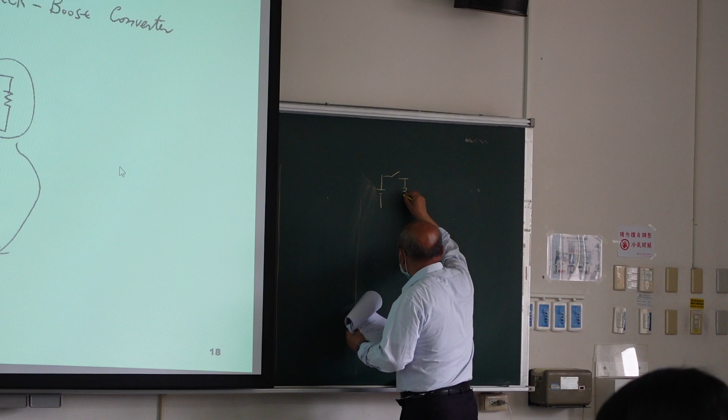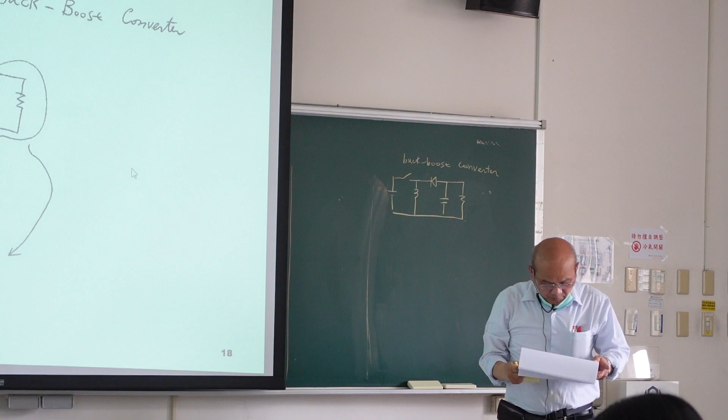Because it can create buck and also boost converter. So you think buck-boost is great because it is a new idea, and we use only a few devices, but we can obtain buck and boost together.

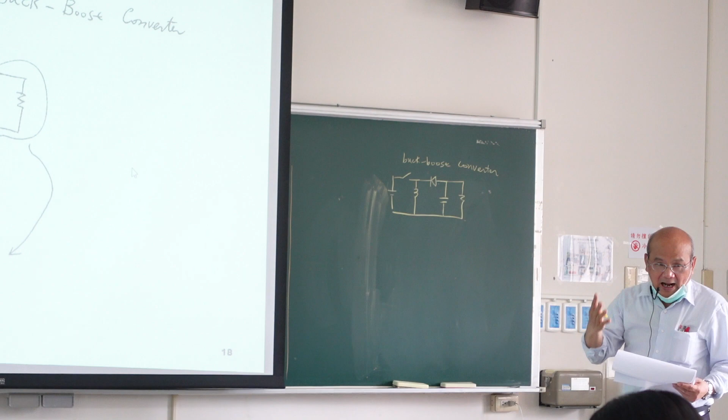Then there was a professor. He has a student, his name is Cuk. The student was studying at Caltech, which is a quite famous technology university. So the professor asked Cuk to go back and sleep, and asked him to develop a circuit which is the duality of the buck-boost converter.

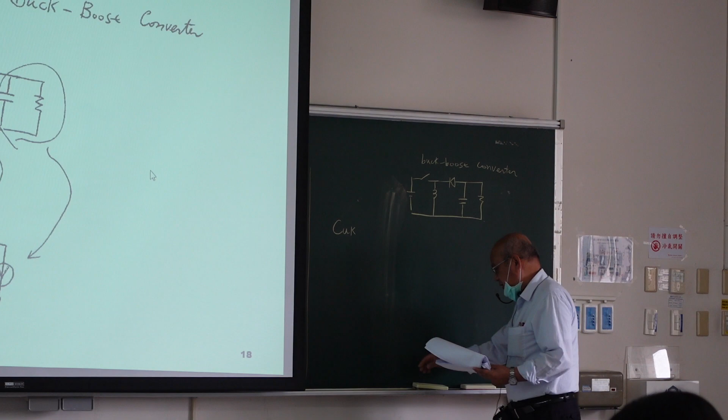So he said, can you go back and sleep? And after one month, you propose a new circuit which is the duality of buck and boost converter. And then he went back to get enough sleep, and then he considered how to do it. So finally, he developed a circuit.

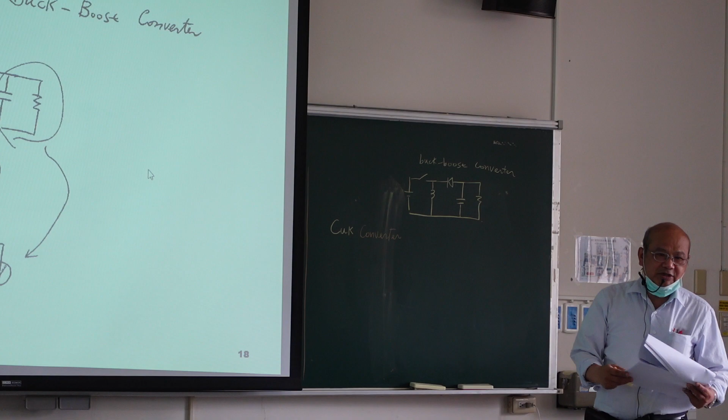So why do we call it Cuk converter? Because Cuk invented this converter. So people use his name, like Ohm's law, Ampere's law. So people use his name. His name is Cuk. So we call it Cuk converter.

So what did he think? He thought, if we have a voltage source, what is the duality of voltage source? We know current source, so it is simple. You can convert the DC voltage into DC current. So you have a series switch.

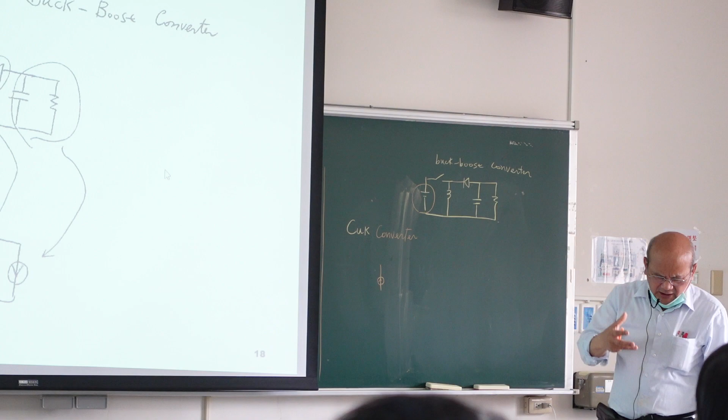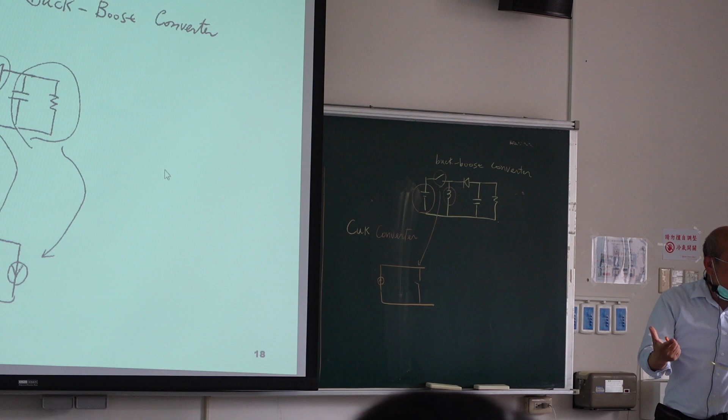How can you design the duality of series switch? Parallel switch. So when this switch is series, then I should convert it to parallel, so parallel switch. Then we have shunt inductor. What is the duality of shunt inductor? Shunt is series, inductor is capacitor. So he said we have to change to series capacitor.

Then we have series diode. What is the duality of series diode? It is shunt diode, or parallel diode. So he changed this one to this one, so this one to this one.

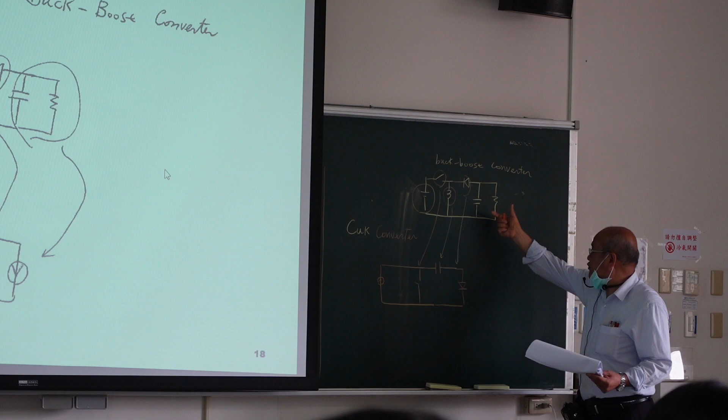Then output load - we have voltage output load. What is the duality of voltage sink? Should be current sink, right? So it should be current sink. So this is voltage sink, now we change to current sink. So this is his idea.

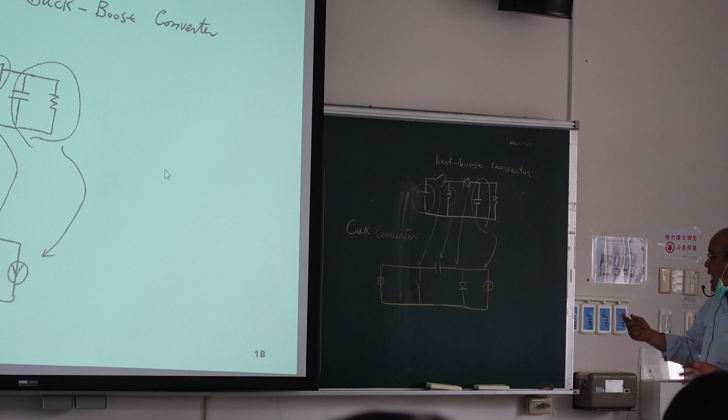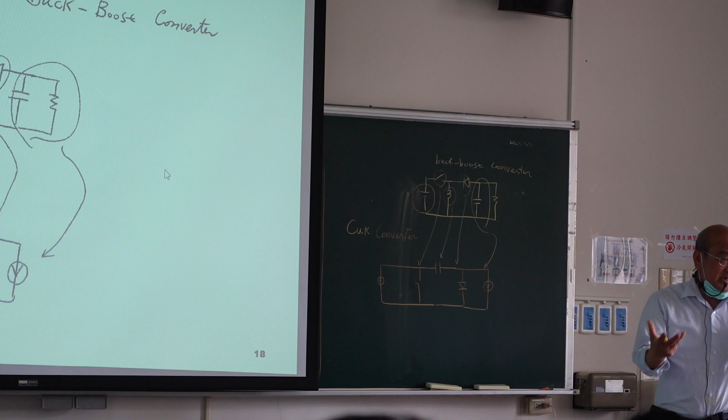But how can you implement a circuit to require current source, current sink? How can you buy a current source and a current sink? You cannot buy it, right? Because there are no such things. So how can you do it? You have to design it. So he went back to think, how can we design this circuit?

And then he said, if we need a current source, what can we do? We have a voltage VG, but we can add a series inductor. Then it becomes a current source. So we use this one to synthesize a current source.

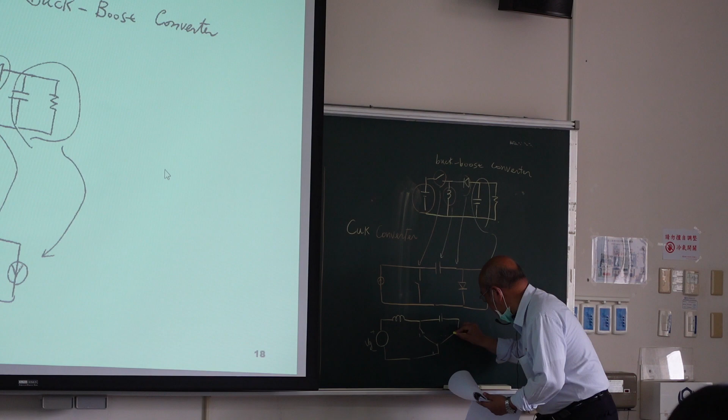Then we have a switch. So we have a switch here, and we have a capacitor. So the switch can go here or go here. We have to draw it better. So we have a switch, it can go here or it can go here - we have two choices, switch here or switch here.

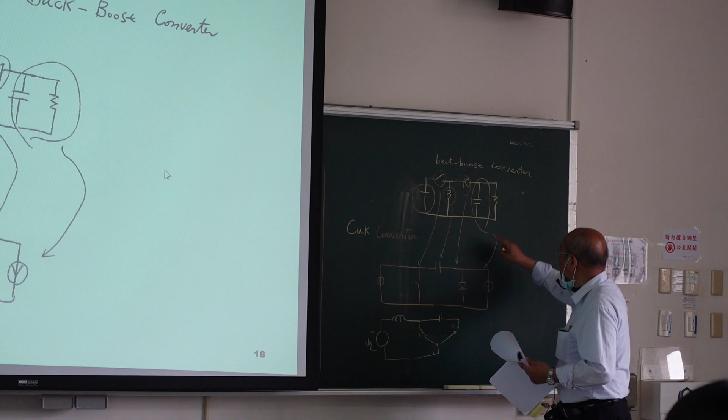And then what do we have? We have this one, current sink. What is current sink? Current sink means we have constant current, so we need an inductor. So this is the inductor - current sink, inductor.

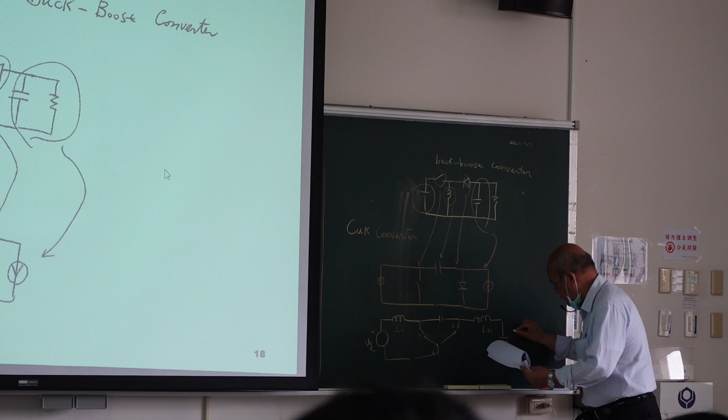Then we need a load. But our load should be voltage, because it's a DC-DC converter, right? Output should be voltage, not current. So we need voltage, and then we need to smooth the voltage. So we have to use a capacitor to smooth the output voltage. And then we need a load.

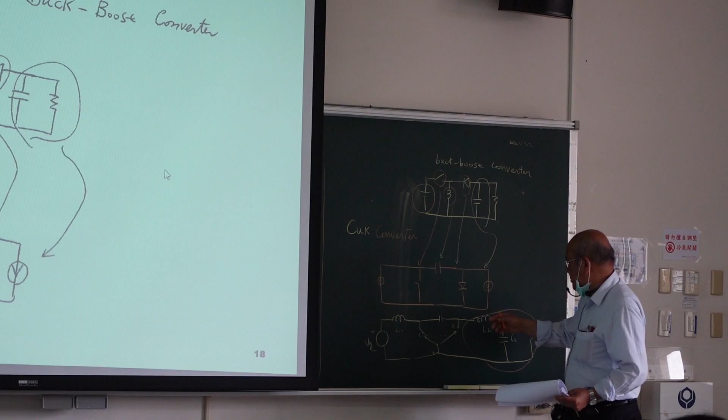So this one is equal to current sink. This one, between the switch and the diode, switch and the diode - this one is capacitor, and this one is current source. So then he finished his design. He proposed this circuit. So what is this circuit? Cuk converter.

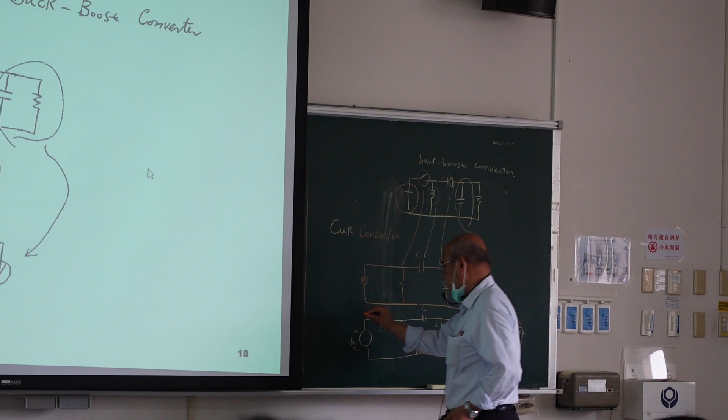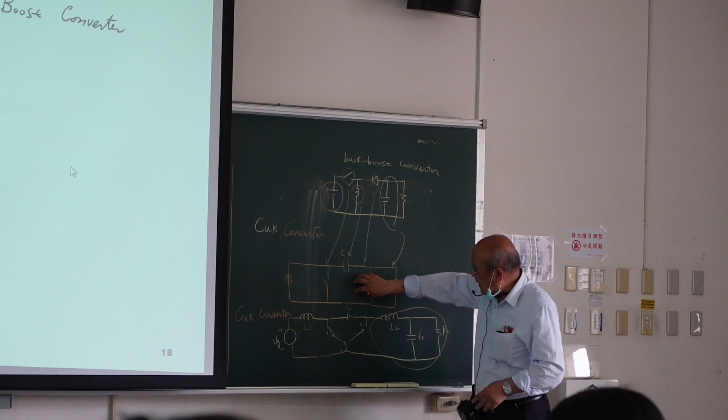So if you see this circuit, you have no idea because it is so complicated. How can you think about this circuit? It is impossible. But in Cuk's brain, he thought, I have two steps. First, I convert by duality. Then I use a real circuit to synthesize my circuit.

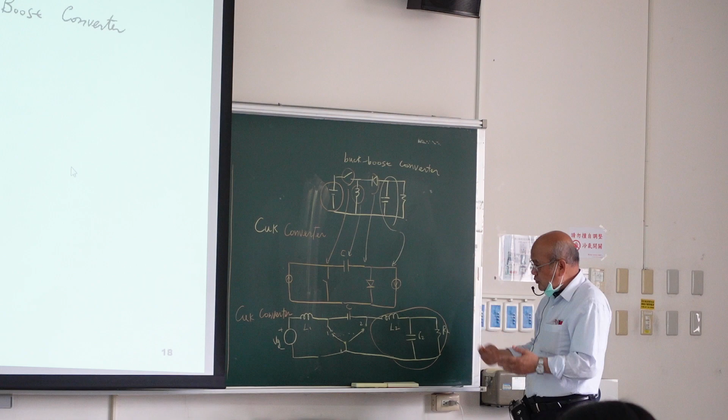Then he got a PhD. He got a famous name, and then he became popular, and then he became rich. He applied for patents. So you can say, I can do it too, but it was too late, right? You have to propose it, you have to be the first inventor. So Cuk proposed this idea.

Then how can we analyze it? So for regular people, we have a headache because it is so complicated. So how can you analyze it?

You can use the blackboard to explain this because it is too complicated.

Ćuk used this as his PhD dissertation, and then people used his name for this converter. So we call it the Ćuk converter. Before we always said buck-boost, but it became named after him because it was very challenging, not easy, so people try to remember his contribution.

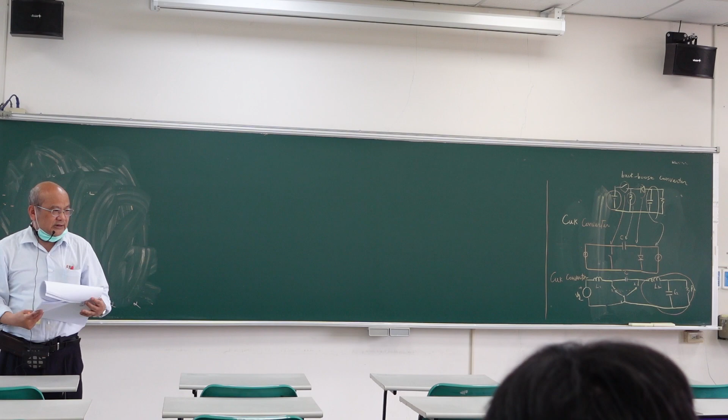If you are a PhD student, do you need to spend all your time in the laboratory doing circuit design? No, you have to sit down and think, because the concept is more important than your circuit. Topology is more important, so he created his own topology.

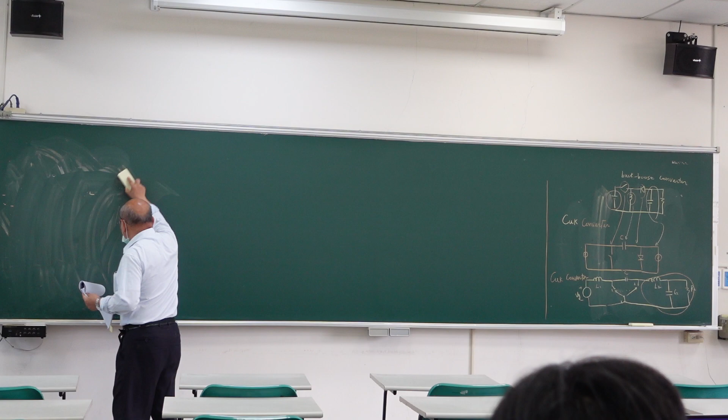Now we want to analyze his circuit. So I draw this circuit again. We have VG plus minus, we have L1, and we have I1. We have a switch here, this is switch 1. We have another switch here, switch 2. We have a capacitor here, this is C1, plus minus V1.

The switch could be connected to position 1, or the switch could be connected to position 2. Then we have inductor L2, then we have I2, then we have capacitor C2, resistor R, and V2. So this is his circuit.

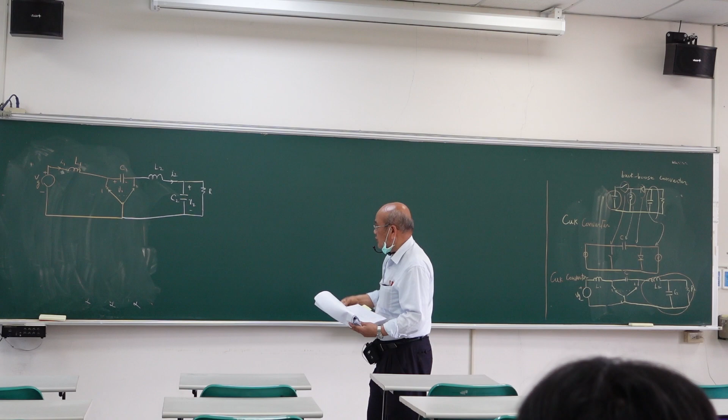But his circuit is too complicated, so we want to go step by step. How can you synthesize the circuit? We can use input voltage VG, and we have inductor L1. Then we have a switch here, and the switch can go here or go here. So what is the switch? Can you suggest? It should be a MOSFET, right?

So here we should have a MOSFET. This is S1, we use a MOSFET. And then this one should be a diode, right? If the MOSFET turns on, the diode turns off. If the MOSFET turns off, the diode turns on, same as before. So we have to put a diode here.

So between them is a capacitor, C1. And then we have inductor L2, then we have capacitor V2 and C2, and we have resistance. So this is the real circuit. This is how we synthesize the circuit.

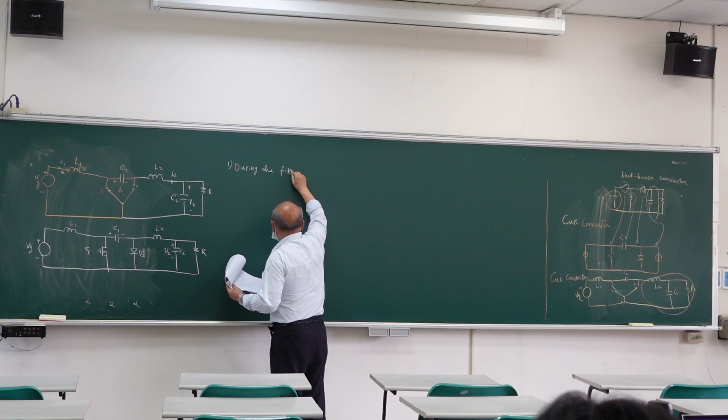Now we have to analyze it, so we have different modes. The first mode, this is the first subinterval. At that moment the switch is in position 1.

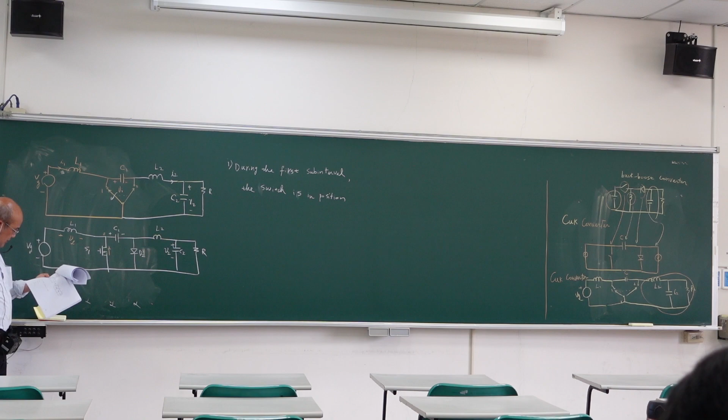So now we make the switch connect to position 1. Then what is your equation? We turn on the switch, so the switch is turned on, so then it becomes 0. If this becomes 0, then this is VL. So what is VL? This is VL1, so we can draw it.

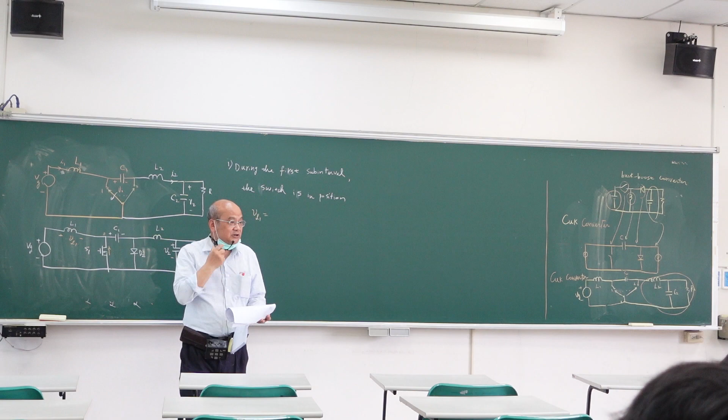VL1 is equal to what? This is turned on, this is VL2, this is ground, this is VL1. So VL1 equal to what? VG, right? VL1 equals VG.

How about VL2? We can check here, this is VL2, plus minus. So what is this voltage? This is turned on, so this is 0. How about this one? This is 0. Then how about this voltage? Minus VC1, right, because this is ground, is 0. So how about this one? Minus C1, so this one minus this one, how about this one? This is VC2. So VL2 is minus VC1 minus VC2. So we can draw this as minus V1 minus V2.

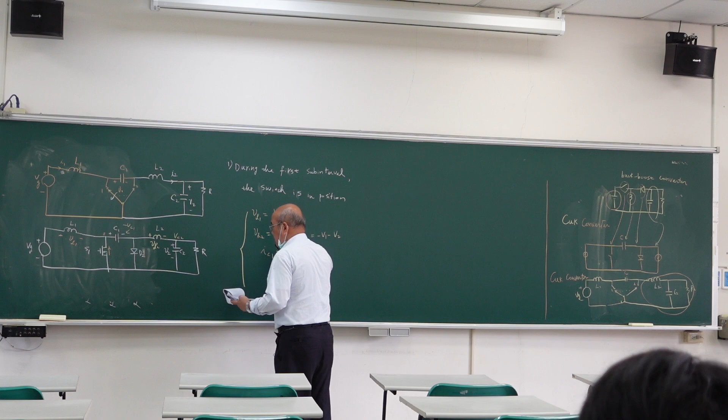How about IC1? IC1 is this current, this current, and I2 is here. So now this switch is turned on, this switch is turned off, so we have current going here. So IC1, IC2, and I2 are in series, right? If they are in series, they have the same current. So IC1 should be equal to I2.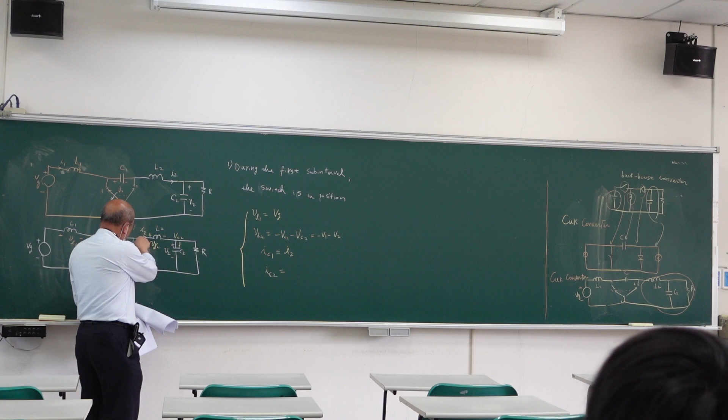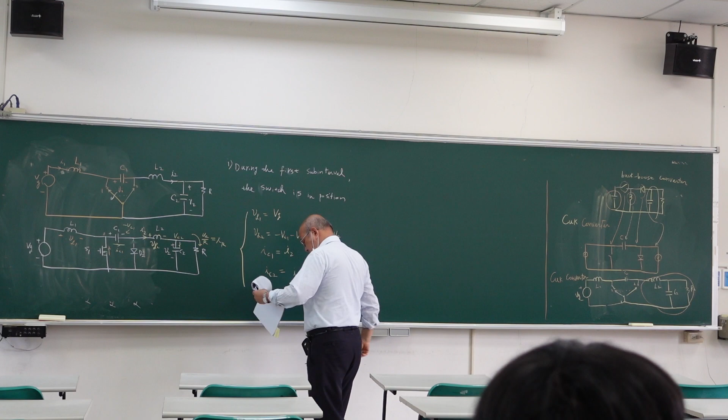And how about IC2? IC2 is this current, so this current is equal to this current minus this current. This is V2 divided by R, it is equal to IR. So this current is input current minus this current, so this is I2 minus IR. So we can say I2 minus V2/R.

So we got four equations. If the switch is in position 1, we got four equations. So this is mode 1. Then we move to mode 2.

So the second mode. Then the switch is in position 2. Then we also have four equations, because VL1 is equal to what?

So now we move to this switch. Switch 1 is off, switch 2 is on. So what is VL? VL1 is here. You can see this is V1, this is ground. So how about this voltage? This is V1. And how about VL1? VL1 is VG minus V1.

So we have VL1, we have VL2, we have IC1, we have IC2. So we have mode 1, we have mode 2. So first, in the first interval, then in the second interval.

In the first interval, how about VL1? VL1 is Vg. How about in the second interval? VL1 is Vg minus V1, right? But in the first interval, VL1 is positive. It is inductance voltage. In the second interval, should it be positive or negative?

Because we say the average voltage of the inductance should be 0. If this is positive, then the voltage average is not 0. So if the first one is positive, how about the second one? Should be negative, so should be negative. So what is the second one? Vg minus V1, so it should be negative.

Then VL2. VL2 is minus V2 minus V1, so it is negative, minus V1 minus V2. Then how about the second stage? Minus V2. So minus V1 minus V2 is negative. Then V2 is more positive, so V2 should be here, minus V2. Right? So because this is negative, this should be positive. So we can draw this waveform.

How about IC1? In the first stage, it is I2. So in the first stage, IC1 is I2. So what is I2? This is the switch here.

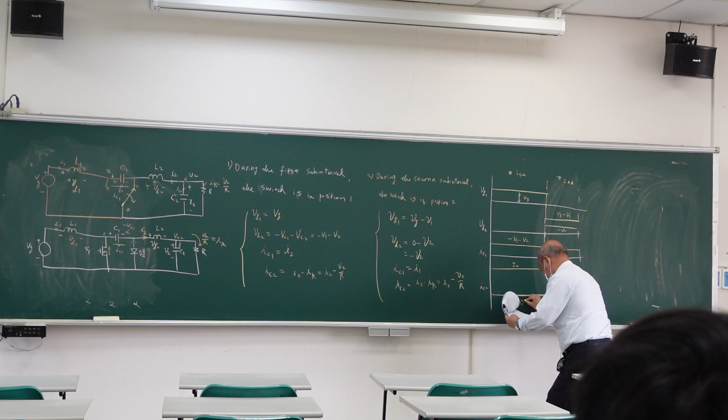And how about the next interval? Because the IC2 is 0 here, it's also 0. So we can draw this waveform. So this is DTS, this is D prime TS. So we have drawn the waveform like this.

So then we can use balance, so we need to make balance. So first, the VL1, what is the average of VL1? Should be 0, because inductor voltage average should be 0, right?

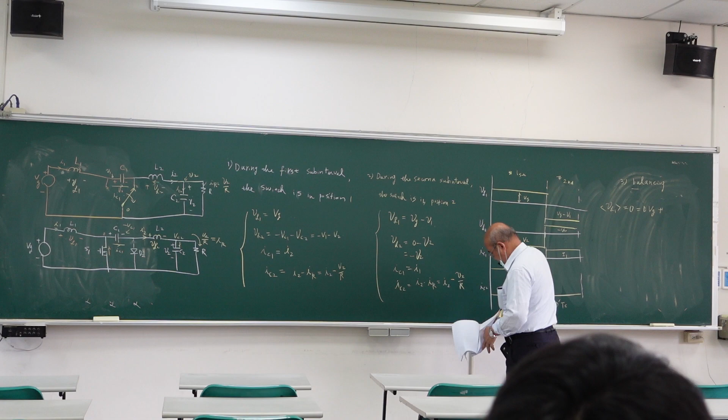So it includes 2 parts. The first stage is Vg, the time interval is D, so it's dVg. The second interval is Vg minus V1, so the time is D prime, D prime times Vg minus V1. So we can say this way.

How about VL2? The average should be 0. So it includes the first part, D times minus V1 minus V2. And the second part, D prime times minus V2 is 0.

And then IC1, the average should be 0. So it includes this part, D I2, plus this part, D prime I1, so it is 0. And then IC2, it is equal to I2 minus IR, so I2 minus V2R, it should be 0 because it is capacitor current.

So now we have these equations like this. So then, first one, we can check this. This is dVg plus d prime Vg minus d prime V1 equal to 0.

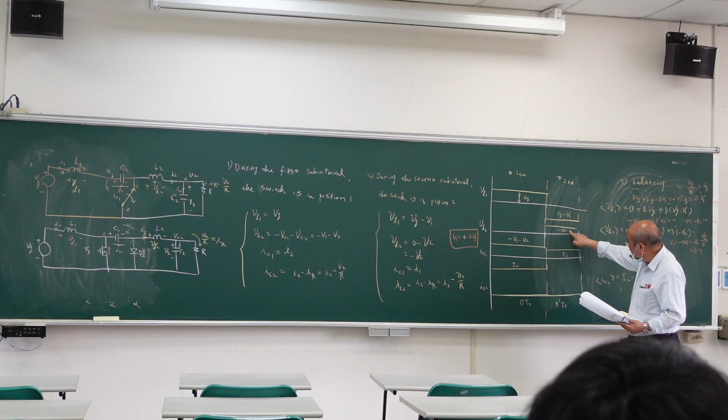Vg is positive, it is input voltage. R is positive, square is positive. So the total should be positive. So I1 is positive, so I1 is positive. So you can check, it is correct.

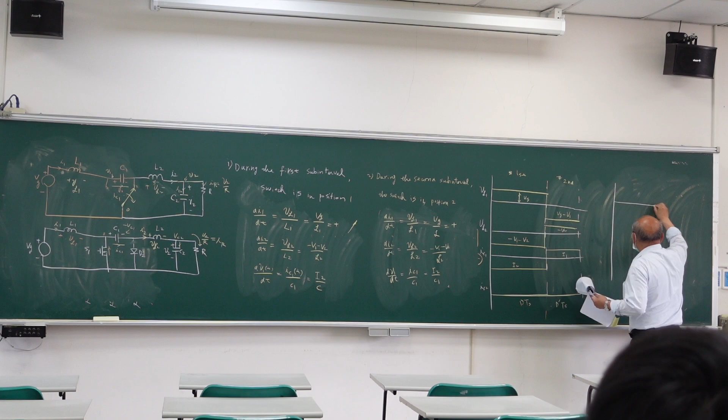So we want to draw the figure. We have I1, we have I2, we have V1. Okay, and I think here V1. So this is 0, and we have mode 1 and then mode 2.

So first I1. So you can see in mode 1, I1 is positive, so dI1/dt is increase. So we have I1 is positive, so it is increase here. And then if we work at mode 2, then we can see here. Check.

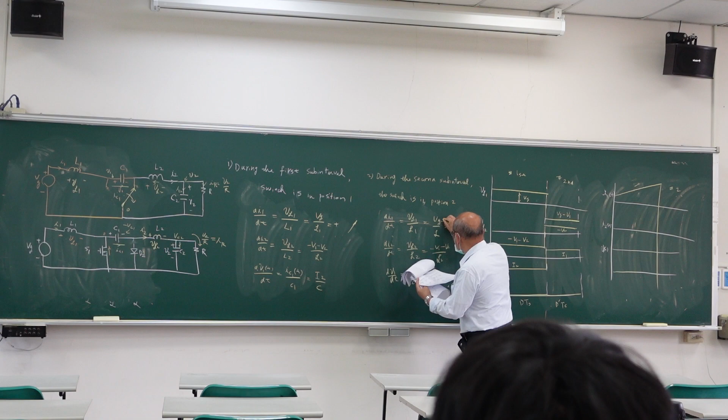So dI1/dt is positive, mod 2. Oh, I made a mistake - this one should be minus V1/L1. So this is Vg minus V1 divided by L1. Mistake, yeah this is a mistake, I copied it the wrong way. This should be minus V2/L2. This is I1/C1. Okay, so this is correct.

So in position 1, dI1/dt is positive, so it is increasing. In the second mode, V1 is larger than Vg, so this becomes negative, but this is positive, so dI1/dt is negative. Here, this is Vg minus V1 divided by L1. It is positive and negative.

How about I2? We can see this one. This is minus V1 minus V2 over L2, so it is negative. And this is minus V2, so it becomes positive, so it is smaller than minus V1 minus V2. So it becomes positive. So in this case, I2 is always negative, but in here it is reduced, then it is increased. So we can draw this one - so this is 0, so it is always negative.

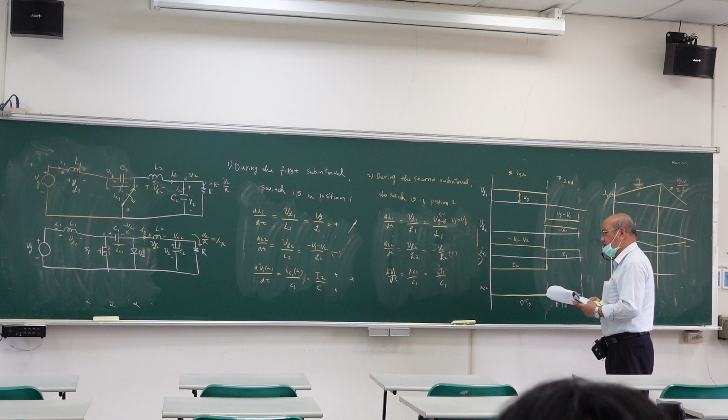How about Vc1? Vc1 is here. First is I2/C, so this is positive, so this is positive. Which means V1 we can draw this one, and then we can have this one. So I2 is negative, so this is negative, but this is positive, this is negative, this is positive, so it becomes negative.

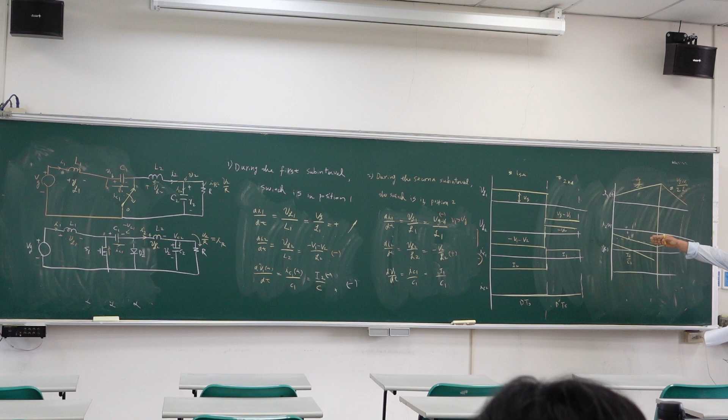So we can draw this one, let me draw this one. It is like this. So it is I2/C1, the slope is I2/C1, and then it decreases. And then after here, it is I1/C1, it becomes positive. So you can see the change. And finally, you can develop the output to input relationship.

So V2 to Vg, this is your gain, K. So V2 to Vg is minus D over 1 minus D. So it becomes buck-boost.

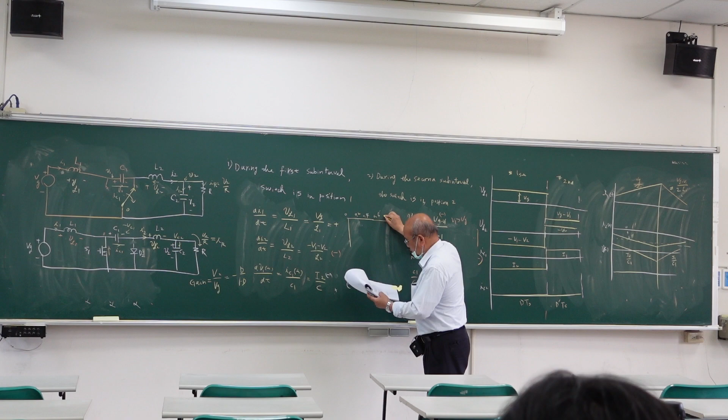So we can draw the relationship. We have 0 here, 0.2, 0.4, 0.6, 0.8, 1.0. If D is 0, then 0 over 1, so it is 0. If D is 0.2, then 0.2 over 0.8, so it is quite small, negative here. If D is 0.4, then 0.4 over 0.6.

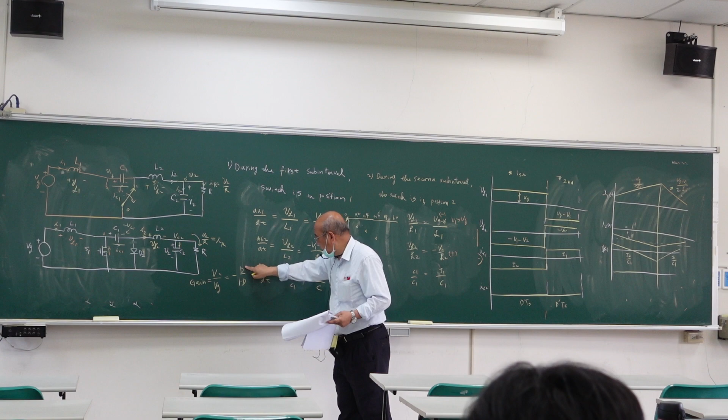And if D is 0.6, 0.6 over 0.4, then it is 1.5. If D is 0.8, 0.8 over 0.2 becomes 4 times. If D is 1, 1 divided by 0 becomes what? Infinity. So you can see the gain is like this, right? So what is, if you control D at 1, you get infinity gain. If you control the duty as small, then the gain is small. So you can obtain the relationship, minus D over 1 minus D, this is the gain.

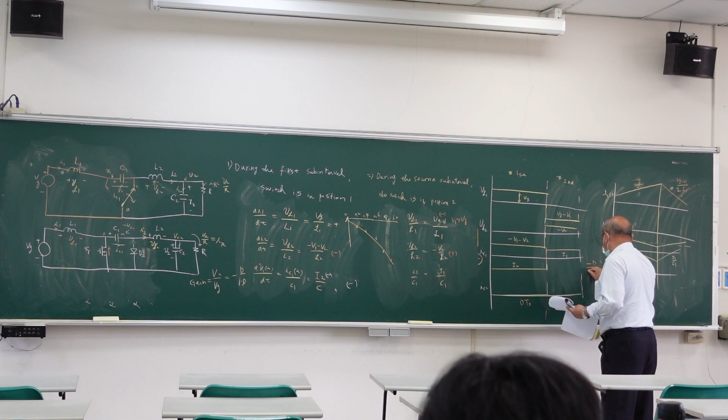So what is this converter? This is buck-boost. So after analysis we see this is buck-boost, and you have to use the balance to see the whole circuit. So what is the principle? Now we want to make a conclusion to check the Cuk converter. What is the basic idea of the Cuk converter?

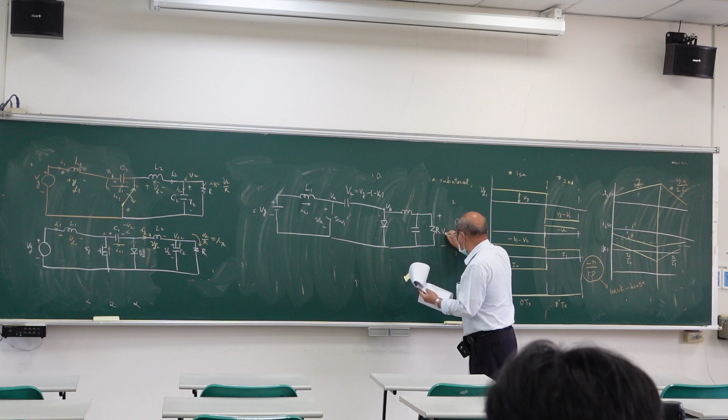So we have VG here, and then we have an inductor here, and we have current IL1 here, we have VA here, and we have a switch here, and we see this is VA. So this is the circuit, and we have a capacitor here, we call VC. So the capacitor is VG minus VO, and then we have VB here. We have a diode here, and we have an inductor here. We have a capacitor here, and we have a load here. And then we have output VO equal to V2 here.

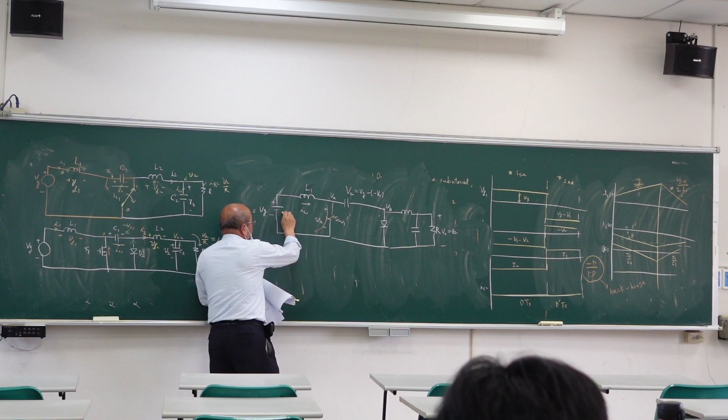So what is the basic principle? If the switch is on, then what happens? We have an inductor here, then switch on - this is short circuit. So how about the current? The current goes this way to charge the inductor, right? If the switch is on, then the diode is off. Because this is, we call opposite, so we can have this one. And if the switch is on, we can go this way. How about this one? Then we can go this way. Go this way. Okay, so we have two loops, but the diode is turned off.

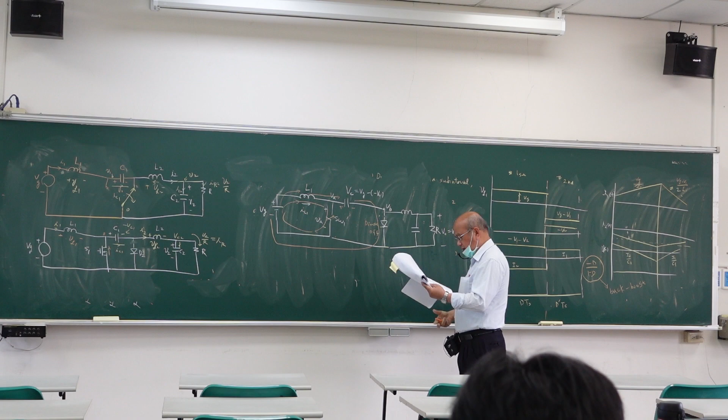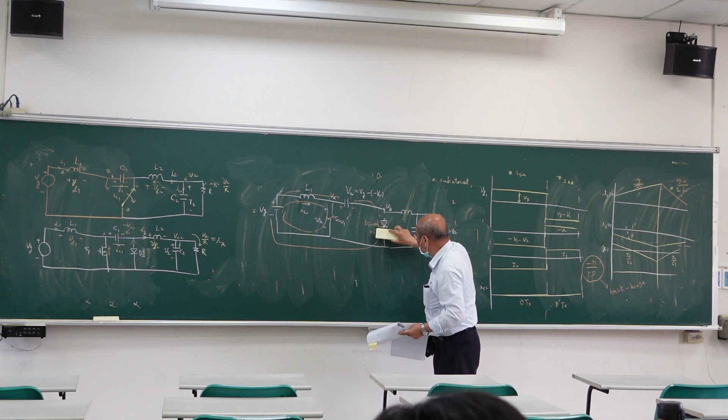So this is turned off, so there is no current here. So if the switch is on, then we can charge the inductor L1, and we also can charge the capacitor. So if switch is on, the diode should be off. Let me check again - if the switch is on, this is off, so this loop can happen. This can, because diode is off, but we can go this way, we can go this way. Then we can check this one - this is minus plus because the output is negative. Then we have no loop here.

Okay, if switch is off, then the diode is on. If diode is on, then what happens? Then we have a loop here, so we have a loop here. If diode is on, then what happens? We have a loop here. So if diode is on, we have a loop from here, and a loop from here. So this is the fundamental idea of the Cuk converter.

And then we can see the waveform. So what is the waveform? So I want to draw the waveform to make a conclusion.

So we have VA, we have IL1, we have IL2, we have VB, so we have 2 more. Okay.

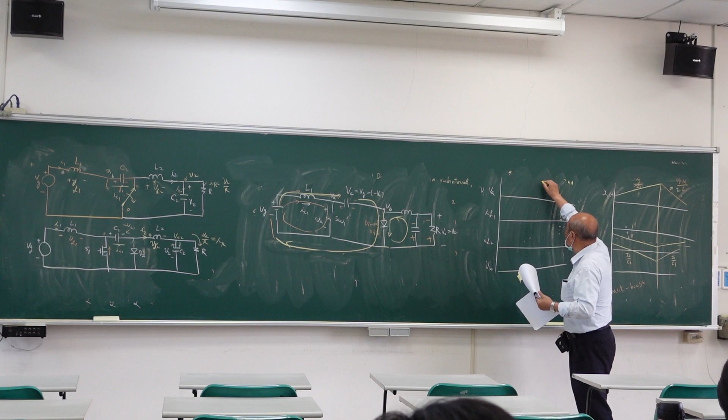So in the first one, switch on. In the second one, diode on. If switch is on, then VA is 0. And the IL1 is increased, so the slope is VG over L1. And the IL2 here is also increased.

So this is VG over L2. And then the output is here. So this is VO. So this is switch on.

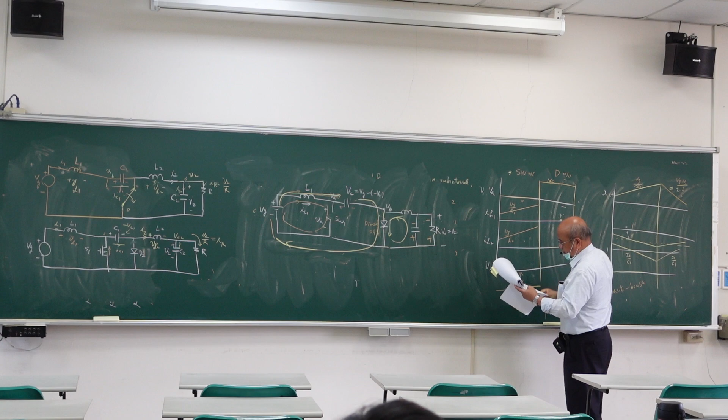If switch is off, then diode on, then we can get high voltage. So this is VC, so VC larger than VG. So this is diode off. And then this one, it is VG minus VC over L1.

So VC is larger than VG, so it becomes negative, so we have negative slope. And this is VO over L2, slope is VO over L2. VO is negative, so it is negative. And this becomes 0.

So we have this waveform. So this is the final waveform.

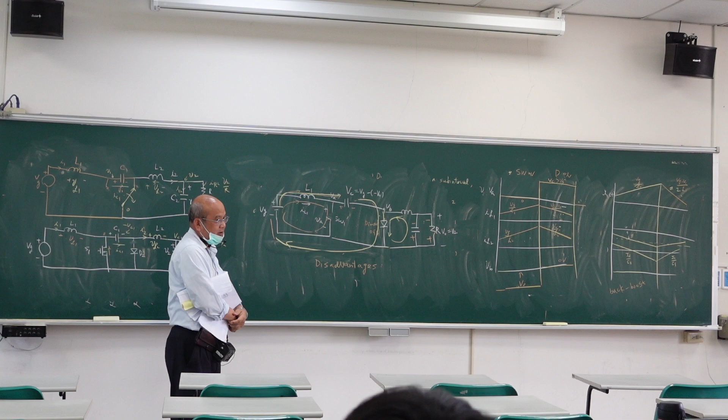So now I want to ask you some question. What is the disadvantage? So can you make a conclusion? If you compare buck boost and Cuk converter, what is the disadvantage?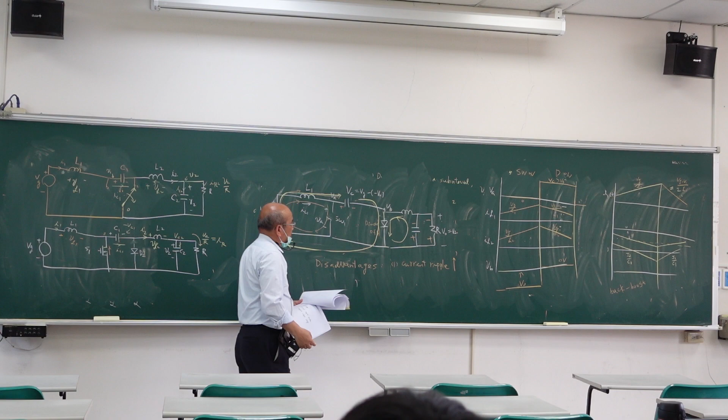The first one is current ripple becomes larger. Because the voltage difference becomes higher.

The next one is negative output voltage.

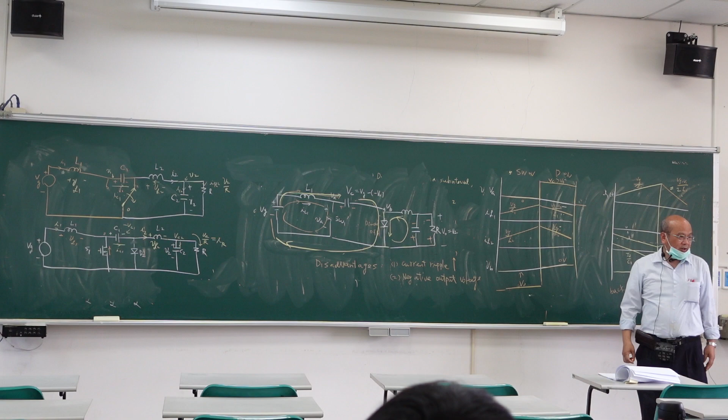But the problem is, what is the advantage of Cuk converter? You spend such a complicated circuit, what is your advantage? So can anyone show me what is the advantage of Cuk converter, if you compare it to the buck boost?

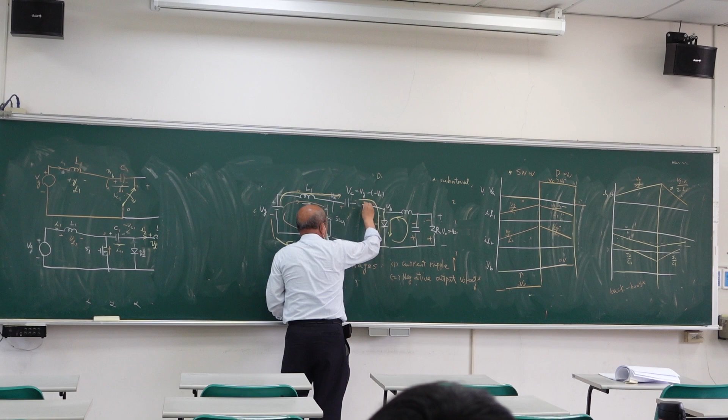So you think, capacitor here, can we use 2 capacitors in series to replace 1 capacitor? Yes, it is okay. If this is okay, can I cut here and put a transformer here? The transformer is 1 to 1. Is it okay? Yes. If I can do this, then I can put this one here, this one here.

Can I reverse the polarity? Yes. Then I can change the output. So this is one advantage.

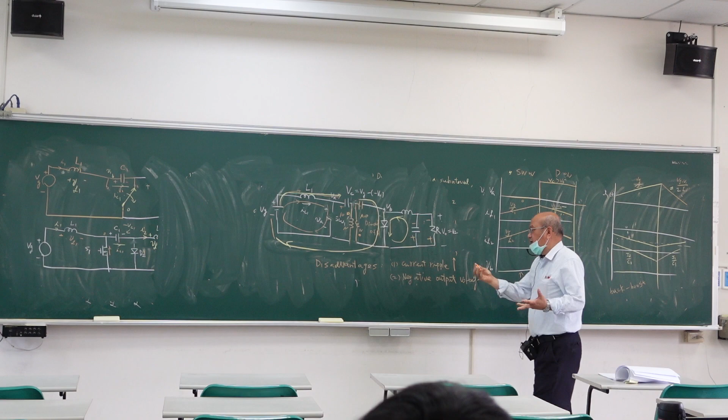Then you cannot change. So for the Cuk converter, we can separate input and output. If we can separate input and output, then we become more safe, because the voltage never comes here, so it becomes more safe. If the output is buck, then here we only have 5 volts. So it is better, it is better.

So the Cuk converter has some advantages. First one is safety. The second one is polarity, we can change the polarity.

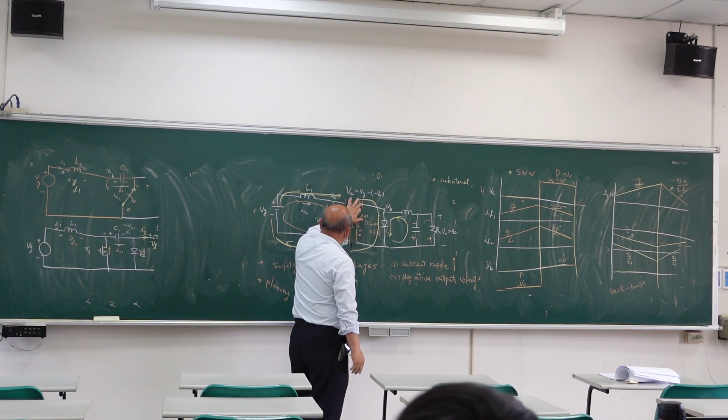And we can use a capacitor here, so the capacitor can do the coupling, so we can block DC. Because if you choose a capacitor, only AC can pass, DC will be blocked. So it is another good thing.

But if you use buck boost, then you cannot block DC. So here you can block DC. So we still have some advantage. So you can see some papers still use Cuk converter to study, because it provides some advantage.

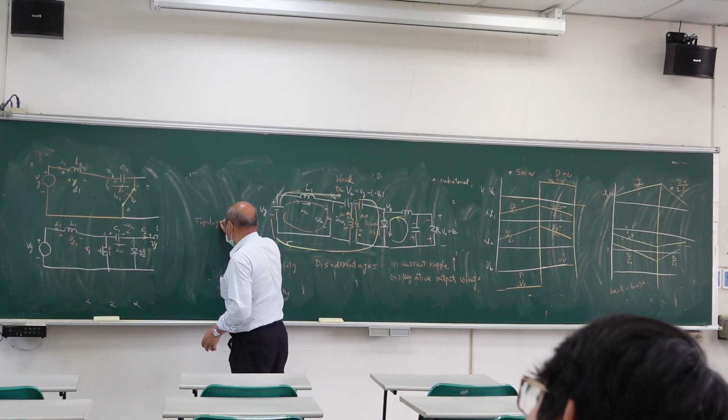So from this course, we can learn the idea of the DC-DC converter. So what is more important? Topology. We have to develop topology because topology is important, right?

So if you want to do topology, is it easy? No, it is fundamental, right? So topology is not easy. If you want to use topology, what should you study? You have to study electrical circuit.

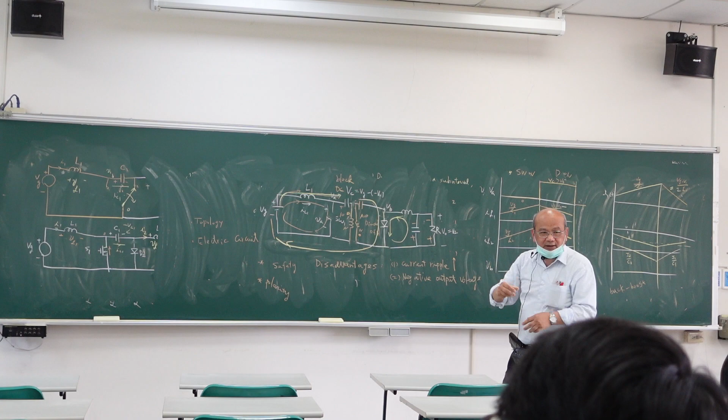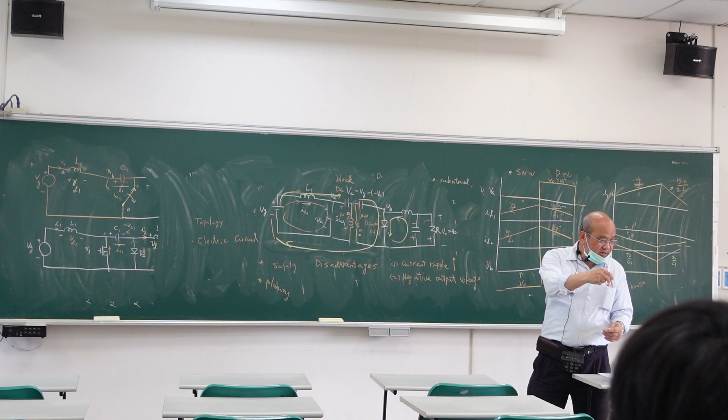So topology is more important than circuit, because you have topology first, then you have circuit next. So if you only do the revision for the circuit, in general people say you are doing minor things, small changes. Like this pen, if I change to black, can I apply for a patent? No, because it's only color. If I change the shape, can I apply for a patent? No.

But if I change the principle, the result is better, can I apply for a patent? Yes, you can. So topology is more important than circuit. But topology is very hard, like the Cuk converter, very complicated.

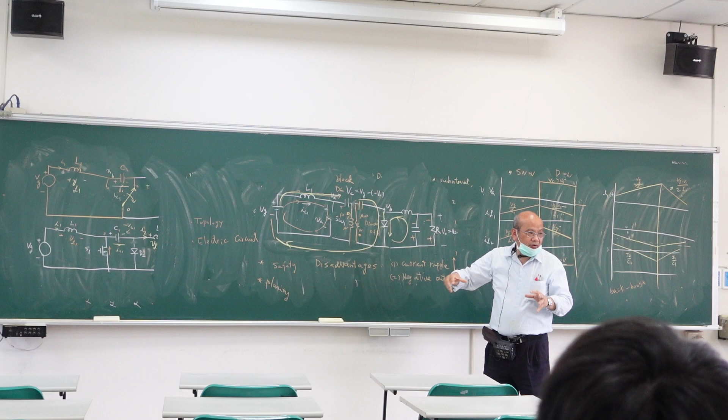He used duality, right? And he used mode 1, mode 2 energy patterns to show everything is fine. And then finally he proposed what is my disadvantage, what is my advantage. So it becomes a big tree, not a circle. So from here we can learn something.